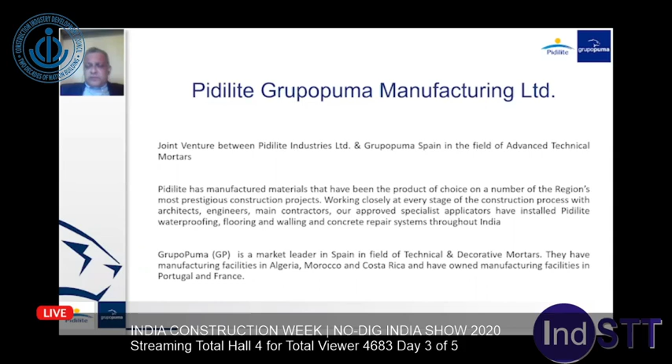Talking about our partners, Grupo Puma Spain, they are a market leader in Spain in the field of technical mortars, and they have very high-end expertise in restoration of old architectural monuments, with more than 20 manufacturing facilities in Spain. They have a presence in many European countries, manufacturing facilities in Algeria, Morocco, Costa Rica, Portugal, and France. They are also trying to make headway and are reasonably successful in the Middle East, Latin America, and South Africa.

The agenda - I am going to be talking a bit about energy consumption patterns in India, energy efficiency initiatives, ECBC 2017 guidelines, and Pidilite solutions for ECBC compliance for both roof and walls. The main agenda for today is a detailed presentation on EIFS, which will be done by Pepe.

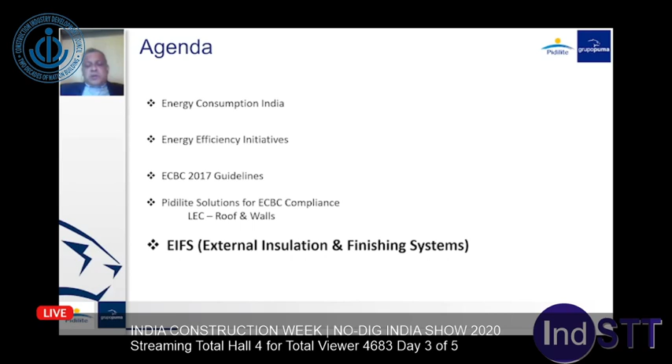Energy consumption in India - present energy consumption in India is 12 gigawatt hour per annum, expected to rise to 13.5 gigawatt hour by 2030, which is roughly about 12% more. Almost 65% of the energy generated in India is by thermal power plants, with obviously high production cost and more environmental damage by CO2 emissions.

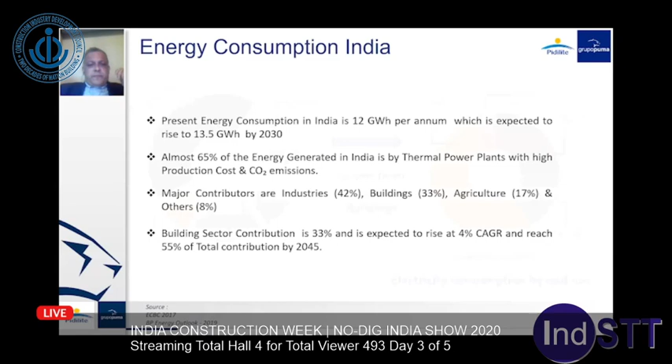Major contributors for energy consumption are industries at 42%, buildings 33%, agriculture 17%, and others 8%. The building sector's contribution is 33% of the total and is expected to rise at 4% CAGR and reach 55% of total contribution by 2045.

In the commercial building segment, the largest consumption is in the area of HVAC, which is 55%, lighting which is 25%, internal load 15%, and others 5%.

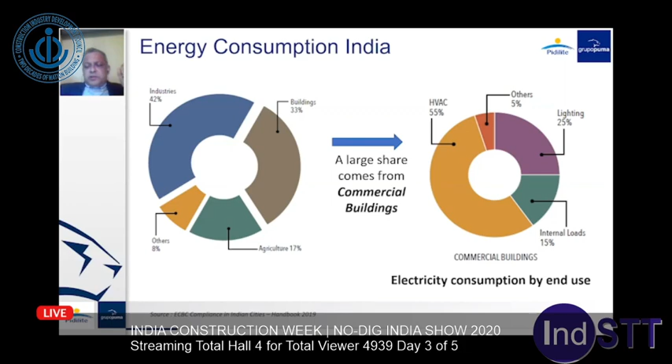Energy efficiency initiatives taken by government and private sector - as all of us know, the present government is especially focused on energy savings and on environment, and has made pronouncements and commitments nationally as well as internationally, taking leadership positions for CO2 emission reductions internationally. India has committed to reduce the emission intensity of the economy by 33% by 2030 from 2005 levels.

There are multiple initiatives, but what we are just going to briefly talk about is ECBC. For energy use optimization, the Energy Conservation Building Code (ECBC) was framed in 2007 and revised in 2017 by the Bureau of Energy Efficiency, making it more stringent, with more focus on infrastructure for implementation of ECBC guidelines, and certain standards and processes for monitoring progress and implementation of the code. Hypothetically, if ECBC had been implemented in 2007, savings would have been 4.3 billion electricity units and a 30 million metric ton reduction in CO2 emissions.

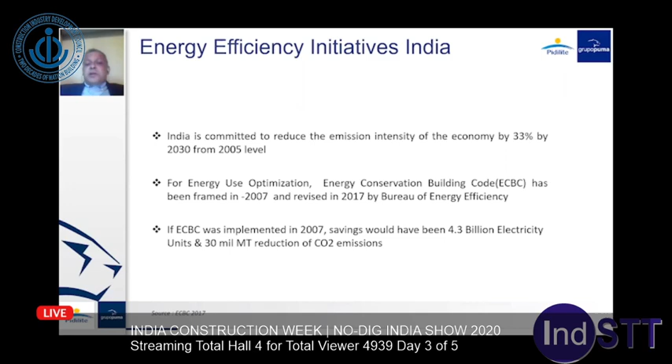ECBC 2017's primary objective is to provide minimum requirements for the energy efficient design and construction of buildings. The scope covers both commercial and residential buildings.

Right now, it has been made mandatory for commercial buildings with a connected load of 100 kilowatts or greater, or a contract demand of 120 kVA. For residential buildings, ECBC-R has been introduced but not made mandatory, though it is likely to become mandatory in the near future.

There are three levels of compliance: ECBC Basic, ECBC Plus, and Super ECBC. Basic level compliance is being made mandatory, and ECBC Basic should give an energy saving of 25% compared to a typical building. ECBC Plus should give 35% energy saving, and Super ECBC should give 50%.

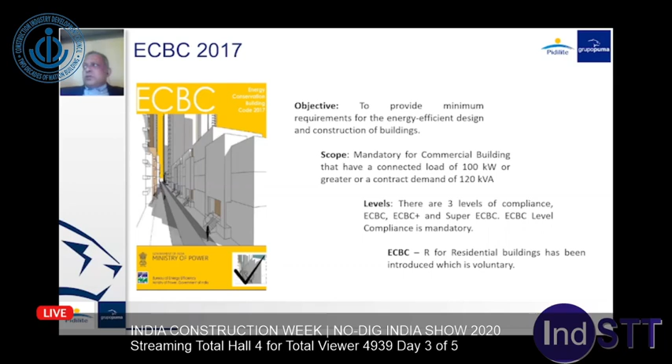Now, there are two methods of achieving ECBC compliance: the whole building performance method, and the prescriptive method.

In the whole building performance method, it has been left to the project owner to decide how to configure the project and its various elements to achieve basic compliance mandated by ECBC, guaranteeing a minimum energy saving of 25% over a typical building, which has to be attested by energy simulation software approved by BEE. So here the prerogative lies with the project owner to do what he finds more convenient and feasible.

Whereas in the prescriptive method, there already exist standards and specifications for various elements of the building, which a project owner has to meet to comply with ECBC basic standards.

For example, for the building envelope, for the roof as well as the terrace, there are certain U-values defined which a project owner has to meet to take ECBC compliance.

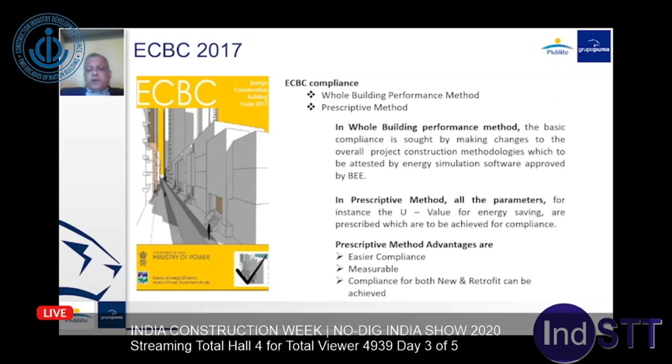Especially, this is a very good way to achieve compliance in case of retrofit buildings, where the project owner doesn't actually have to make any changes to the structure of the building. They can just apply it on the facade and roof and achieve basic compliance.

There are basically five climatic zones: composite, hot and dry, warm and humid, temperate, and cold, with different types of buildings already prescribed. I believe Karnataka is the only state where all five climatic zones can be found.

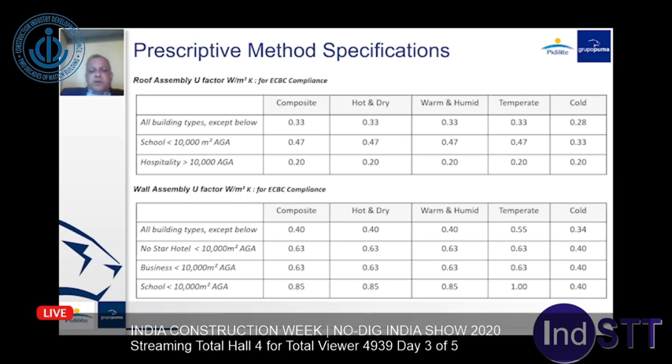Now, Pidilite offers solutions both for wall and roof for meeting ECBC compliance. For the roof, we have low energy consumption systems which we offer, including both the product as well as the execution.

The project owner has the scope to take different types of material at different U-values, different thicknesses, and different waterproofing guarantees. We are probably the only company offering a 25-year waterproofing guarantee, and it is possible to achieve much lower U-values compared to the prescribed U-values for roofs by going for Pidilite LEC systems.

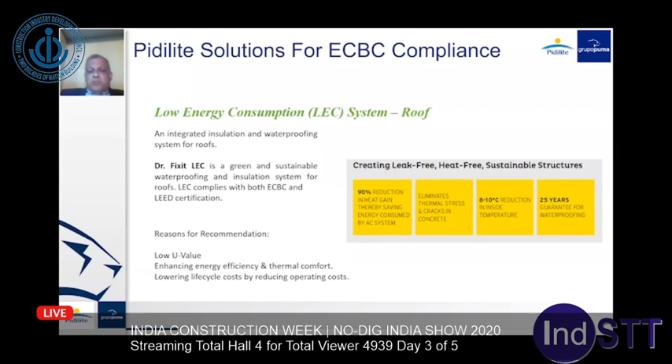As for walls, we offer EIFS in collaboration with our joint venture partners, Grupo Puma Spain, who have extensive experience in product development and execution, with projects lasting more than 20 years, and multiple facade options with beautiful architectural finishes. So we will be offering EIFS for wall insulation.

And to talk about EIFS in detail, I invite my co-presenter and partner Pepe. Once again, thank you for giving us this opportunity. Pepe, please take over. Thank you.

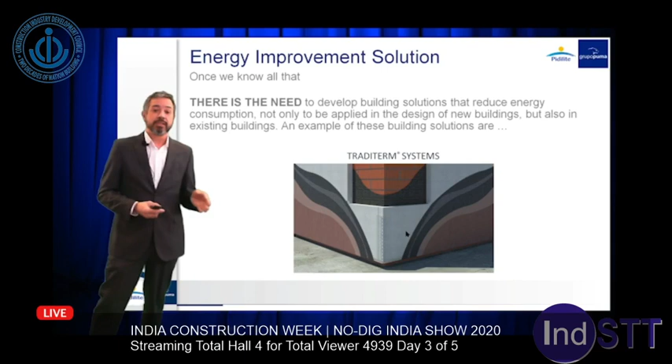Thank you, Prasad. As we have seen all this information, we decided to develop a new thermal isolation system. We are going to see why we decided to make an EIFS, and what are the main advantages of EIFS systems.

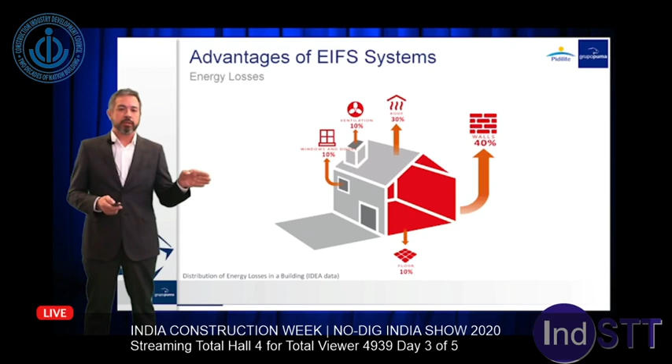First of all, the main studies on energy saving of buildings say that most energy losses in buildings come across the walls of the building. 40% of energy losses go through the walls. That's why we decided to develop a thermal isolation system for walls.

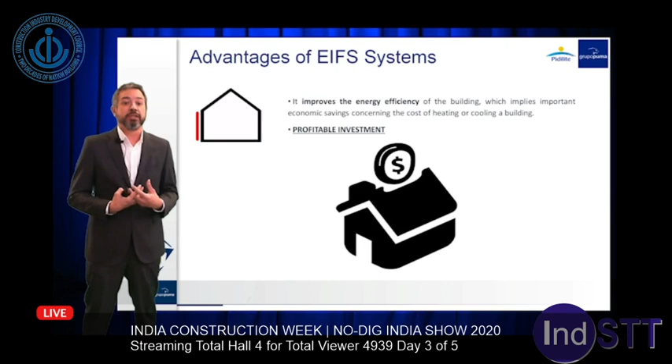This kind of system will not be an expense, but a profitable investment. In a short term of time, we will recover the amount spent on installation of the system through the savings in heating and refrigeration energy thanks to the installation of the isolation system.

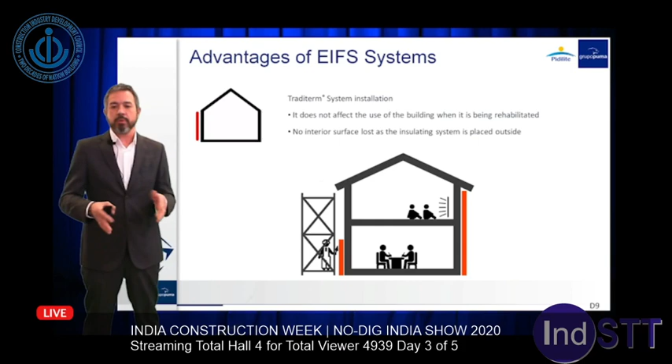As a system installed outside the building, it has several advantages in renovation of existing buildings, because the installation of the system doesn't affect the habitability of the building. So the normal use of the building can continue while we are installing the isolation system. And in addition, we are not losing any space inside the building.

As this system works as an envelope of the building, we are not only getting thermal isolation of the building, but also we are protecting all the structure and materials of the building, because we are protecting it from weather agents - the wind, the rain, the change of temperature. All this doesn't arrive to the components of the building, so we are making the life of the building longer.

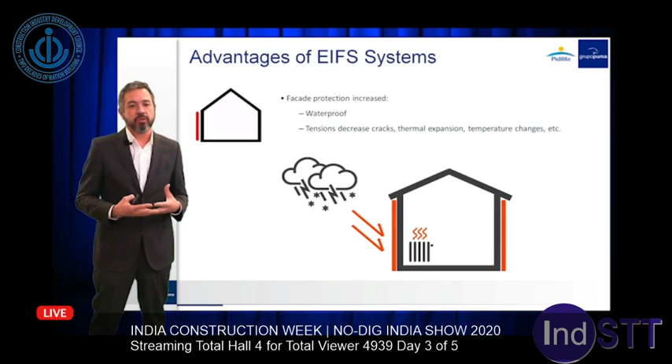All the components of the system, and the system itself, are waterproofing and are also permeable to water vapor, so they breathe the building.

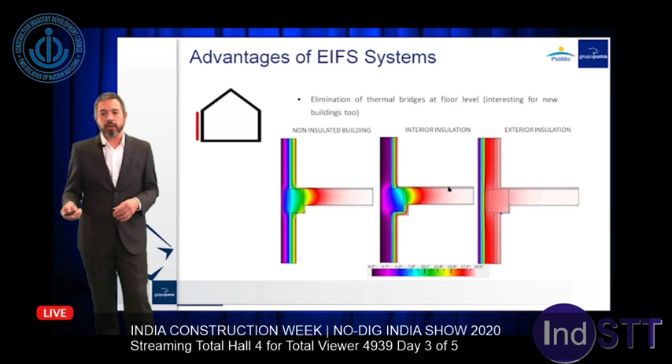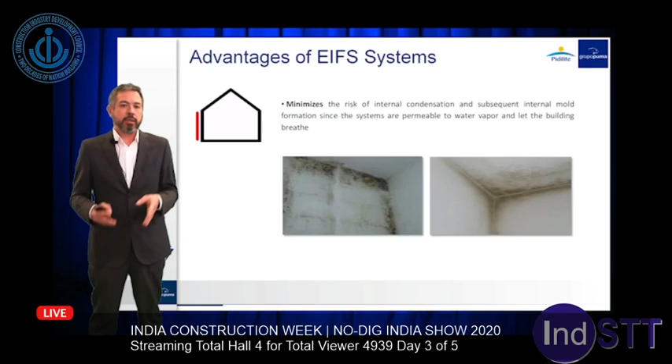As there is an external isolation, we eliminate all the thermal bridges we have in non-isolated and even in buildings isolated inside, because we have these thermal bridges in the slab of the building, and with our EIFS we don't have this kind of problem. So we avoid these problems of molds inside the building because of the thermal bridges and the difference of temperature between inside and outside of the building.

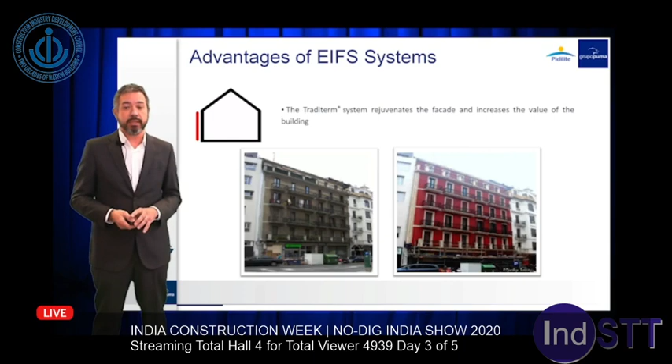And as it's an outside installation system installed in the facade of the building, we are not only getting this thermal isolation, but also we are renewing aesthetically the facade of the building. So we are improving the value of the building.

So we have decided to do this EIFS system. We are going to see now the main characteristics and components of this Traditerm EIFS system.

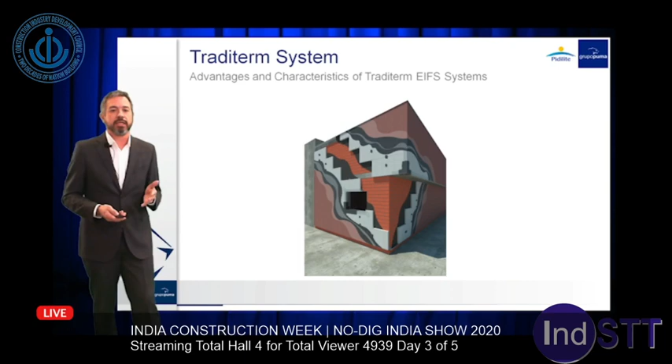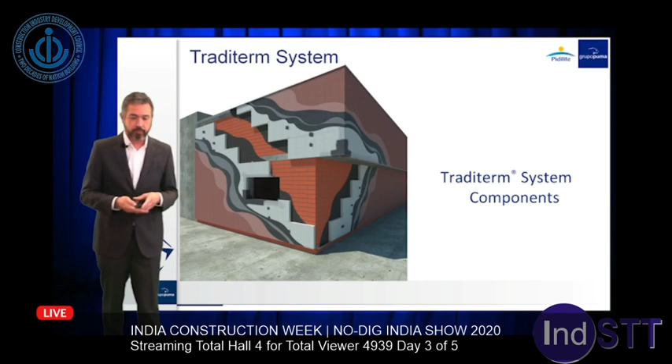As a system, we are offering all the components to the market. Pidilite Grupo Puma not only has the mortar and the finish or the panels, but all the necessary complements for the installation of the system. The installation is very simple.

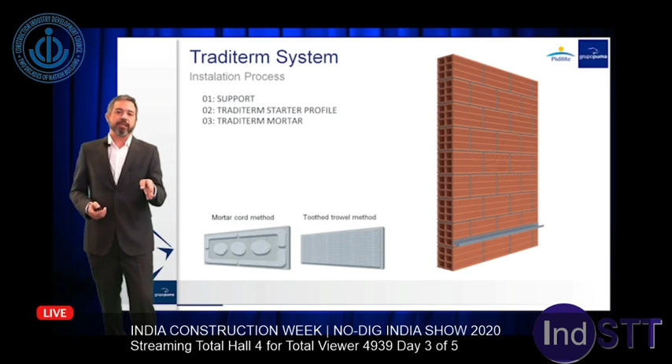We place, first of all, the starter profile, fixing it directly to the wall. We will place the first line of panels over this profile, which marks the starting line of the system. We will fix the panels to the wall by using the special mortar, fixing all the panels to the wall. After that, we will improve this fixing of the panels by installing the Traditerm anchors.

We will make a panel sanding to uniformize, to homogenize the absorption of the panels, to improve the adherence of the coat of mortar we are going to apply now. And we will cover all the anchors with mortar.

And after that, we only have to apply the coat of Traditerm mortar. This is a more or less 5 millimeters coat with a reinforcement mesh inside the coat of mortar, that will give us all the mechanical resistance we need in the system.

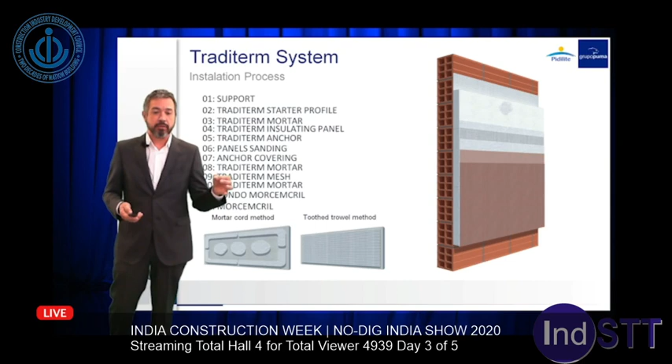And we will finish with Morcemcril Fondo primer and Morcemcril acrylic mortar, which gives us the aesthetical finish in addition to waterproofing and protection of the facade. This is a 5 millimeters mortar, which gives us an aesthetic finish with a wide range of colors.

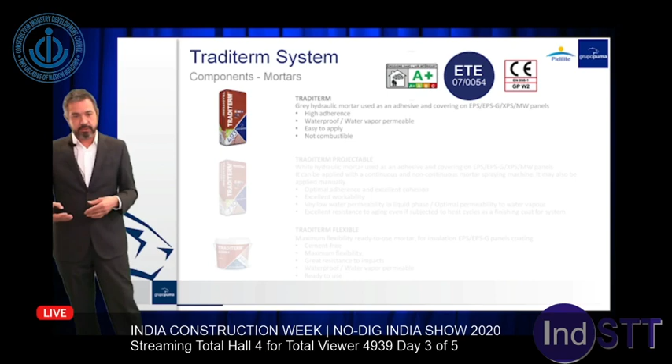So the first component, the main component, is the mortar. We have 3 kinds of mortar. First mortar is Traditerm standard, the most commonly used mortar, and we use this mortar for fixing the panels to the wall and to cover these panels with a render of 5 millimeters more or less. This mortar is a waterproofing mortar, is a breathable mortar, permeable to water vapor, so it lets the building breathe, and is specially formulated to fix this kind of isolation panels.

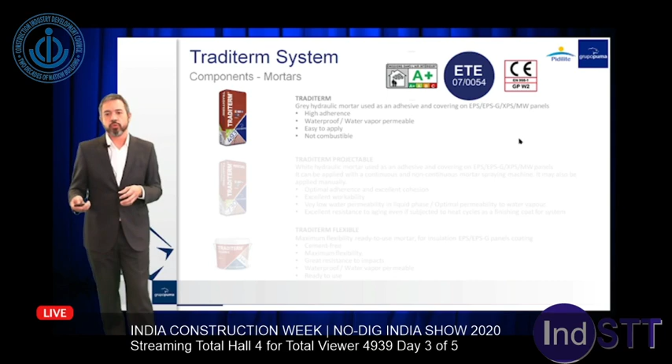So adherence is very, very good. All the components of the system follow the European standards, so we check all the quality controls in order to follow these standards.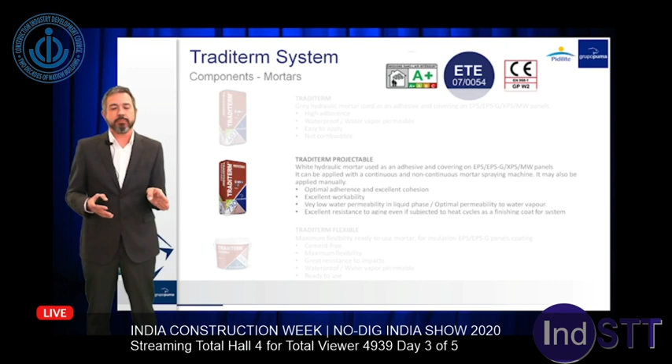The second one is Traditerm projectable. It has the same characteristics of Traditerm standard, but in addition, we can make the application of this mortar by using a projection machine. So we make a faster application, reducing the time of application of the system. For big buildings, this is a good option if we have the machine.

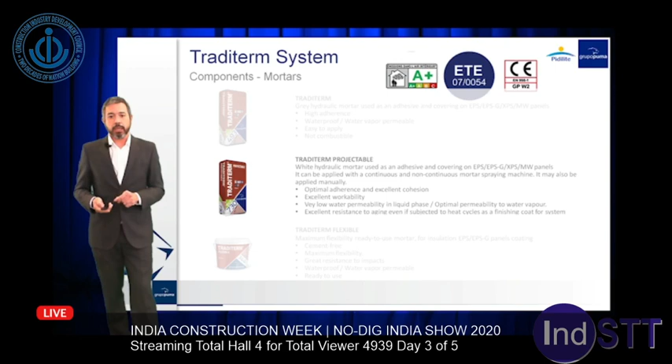And the third one is Traditerm flexible. This is a flexible version of our mortar. It's a cement-free mortar.

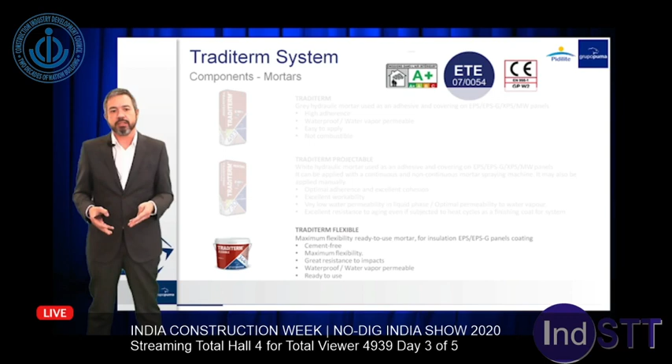It's ready to use, and we recommend this mortar mainly for the flexible version of the Traditerm system, which we'll see later. The second component is the isolation panel.

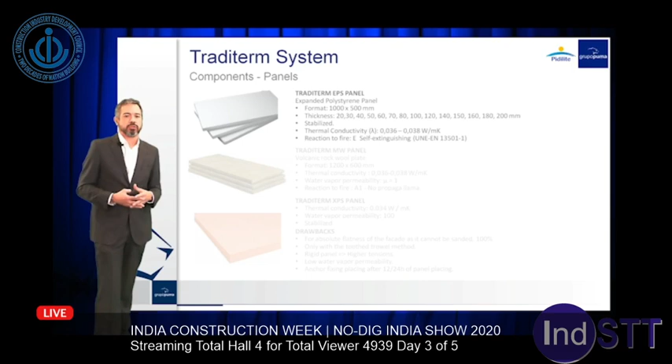That gives us the thermal isolation of the system. We have 3 different isolation panels. The first and most commonly used is the EPS panel, a high density EPS panel. We have it in different thicknesses depending on the level of isolation we are looking for. It's a good solution for thermal isolation because the thermal conductivity of this material is between 0.036 and 0.038, which brings us a very good level of thermal isolation.

The second one is the mineral wool panel. Thermal properties of this panel are very similar to EPS panels, but in addition, this panel has properties of resistance to fire. So it's commonly used in projects where we need this special protection because the size of the building or its use requires improved fire protection.

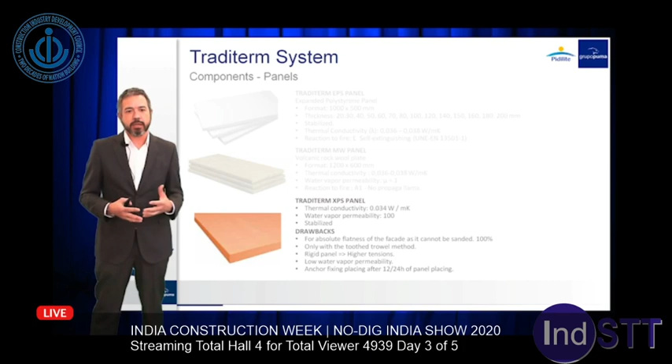And the third one is the XPS panel. This kind of panel has some advantages compared with the others because mechanical resistance is a little bit bigger, since it's a more rigid panel, and the isolation level is a little bit higher than EPS or mineral wool panels. Not so much, but a little bit more.

But on the other hand, since these are very rigid panels, we cannot use them if the leveling of the substrate is not perfect. If we don't have a 100% leveled substrate wall, we cannot use this kind of panel because we can have tensions which develop cracking and problems in the future. The installation of these panels can only be made using the notched trowel system, not the point/dab system, because we need a perfect wall and a continuous layer of adhesive.

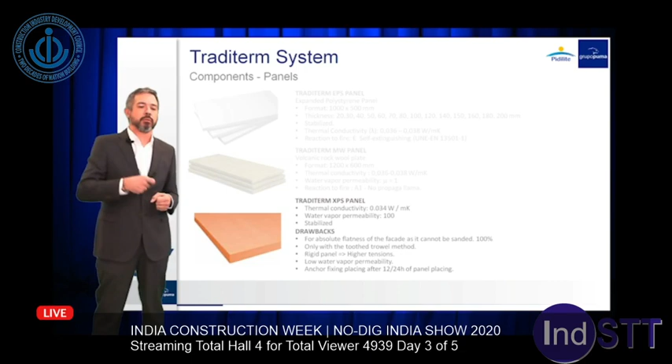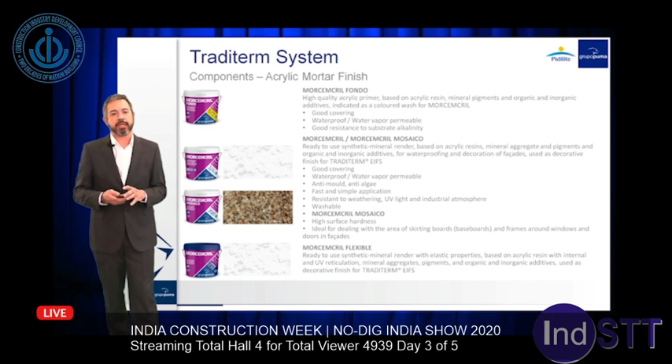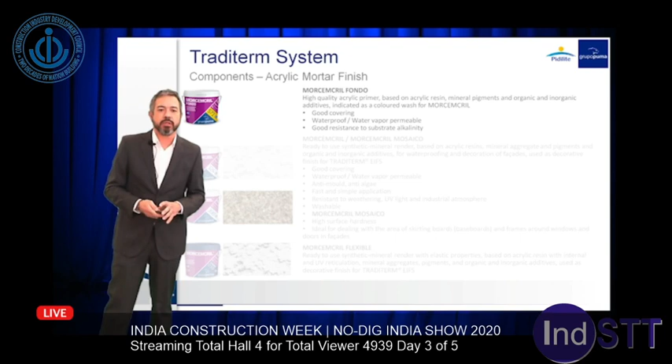And the third component of the system is the finishing. We recommend this acrylic mortar as the finish. We have different versions of acrylic mortar too. First of all is the primer. We use this primer, Morcemcril Fondo, to homogenize the absorption of the substrate and of the mortar we have applied before. As this is a colored primer with the same range of colors as the acrylic mortar, we reduce the amount of acrylic mortar needed to cover the surface afterwards.

After the primer, we can use different kinds of acrylic mortar for finish. We have the standard Morcemcril, the most commonly used one. It's an acrylic mortar, cement-free, waterproofing and breathable like the other components of the system. We apply it in 5 millimeters, and with this layer we have the necessary waterproofing against rain. There is a wide range of colors, which we'll see, and it's easy to apply.

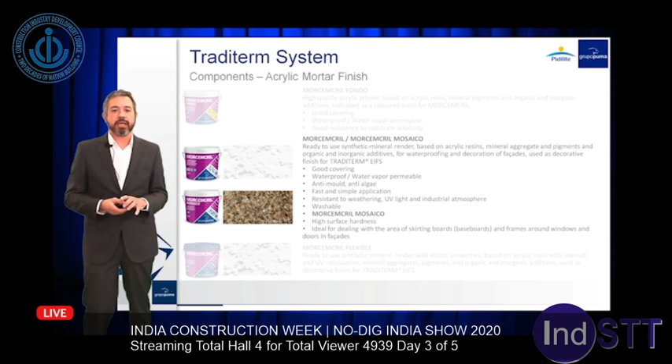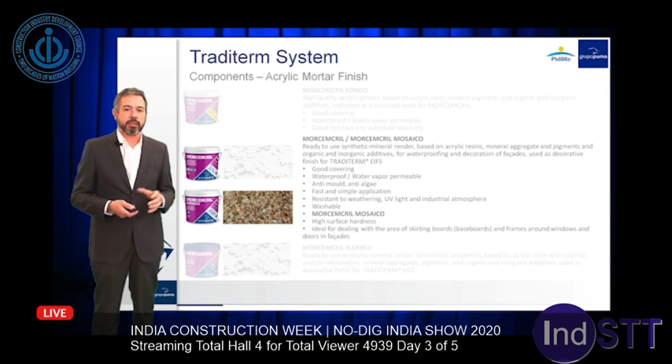It's 100% compatible with the Traditerm mortar. In the lower part of the building, where it's more attacked by people, traffic and so on, we can apply this second kind of mortar: Morcemcril Mosaico, with the same characteristics of waterproofing and breathability as Morcemcril, but with more mechanical strength than the normal Morcemcril.

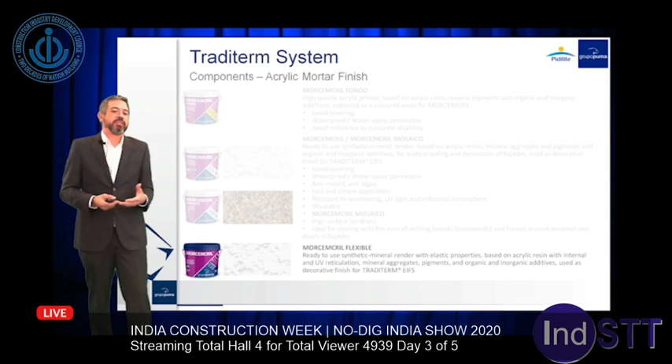And the third kind of acrylic mortar is Morcemcril Flexible. This is a special formulation, especially recommended for the flexible version of the Traditerm system. It has the same characteristics as Morcemcril or Morcemcril Mosaico in terms of waterproofing and water vapor transpiration, but it's also more flexible, so we use it in situations where this flexibility is necessary.

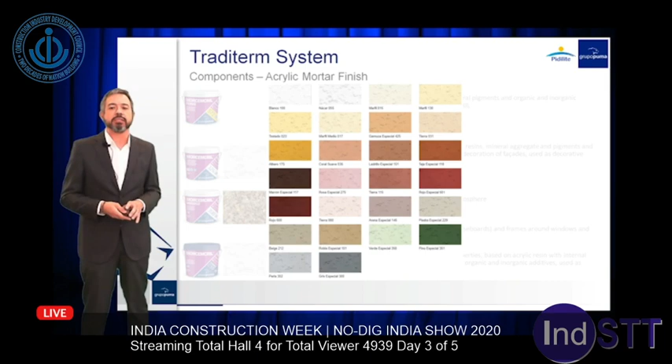In addition to all these main components of the system, we have all the complements necessary for its installation. We have this Traditerm mesh, which we've talked about. It's the mesh we place inside the layer of mortar to improve the mechanical resistance.

The aluminum starter profile is used to start the system, placing the first line of panels. Traditerm anchors improve the fixing of the panels to the wall.

The Traditerm guttering profile with mesh, and the Traditerm PVC corner reinforcements with mesh. This kind of profile protects all the corners of the building and avoids several aesthetic problems of damage to the wall.

Traditerm window finishing profile is used in the joints between the wall and the windows, to make this kind of joint.

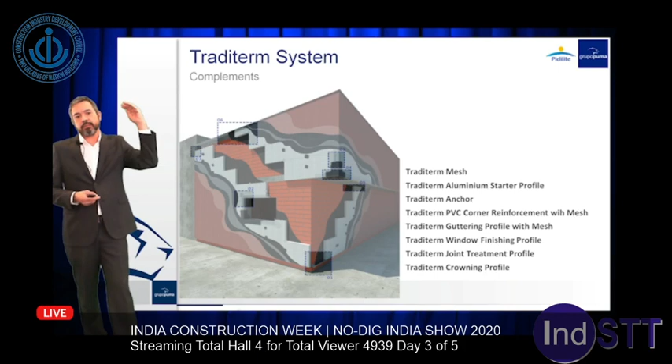Traditerm joint treatment profile covers the structural joints of the building. Traditerm crowning profile is placed at the top part of the system to protect from rainwater. Combining all these components and complements, we find different versions of the Traditerm system.

The first one is Traditerm EPS XPS. It's the basic one, the most commonly used. Here we use Traditerm or Traditerm Projectable as a mortar for fixing and covering the panels. We use EPS or XPS panels for the thermal isolation, and we finish the system with our Morcemcril Fondo and Morcemcril or Morcemcril Mosaico.

The second one is Traditerm Mineral. It's the same as Traditerm EPS XPS, but we use mineral wool panels instead of EPS or XPS panels. Here we obtain the fire resistance we may need in several projects.

The third one is Traditerm Flexible. We use this version when we expect the building to suffer high attacks from weather, big changes of temperature, or when the structure may have little movements. We use this flexible version to absorb and avoid cracking from these movements. In this system, we use Traditerm as adhesive to fix the panels, only EPS panels, and we render them with Traditerm Flexible. The finish is done with Fondo Morcemcril and Morcemcril Flexible.

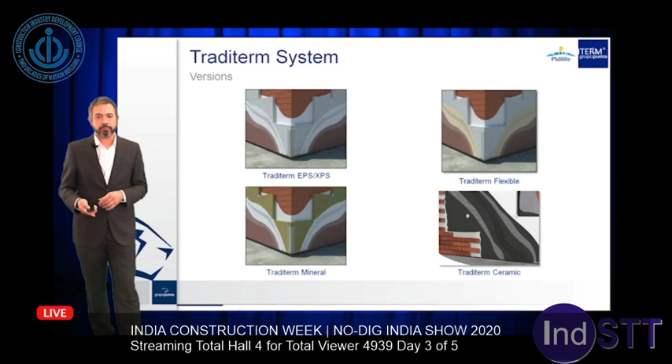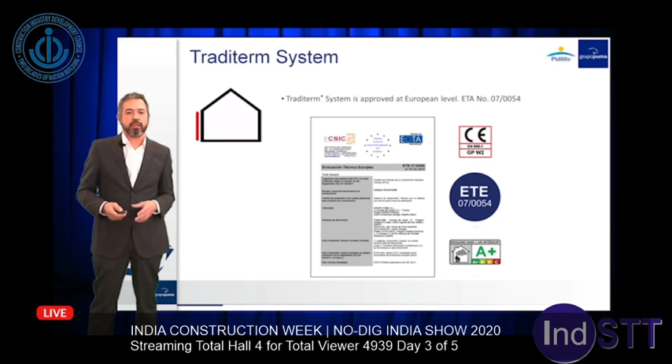All these systems, versions, and components follow European standards. The EOTA is the organism which controls the quality of these kinds of systems in Europe, and the ETA is the document which certifies all the properties of the system for thermal isolation, waterproofing, breathability, and other characteristics. All components also follow European standards for the different kinds of mortar or material we use.

In addition to these product and system characteristics, Pidilite Grupo Puma offers several services to the Indian market to complement the system itself. We have a very trained technical team which works in our R&D department, developing new finishes of the system and always looking for how to improve the characteristics of our thermal isolation systems.

We also have a specialist application team who give professionals involved with installation of these systems the assistance they need, explaining which version of the system is most adequate for the project they are developing, or any assistance needed in the design of the system. We also have applicators who can help and assist the people installing the system in the building, showing how to do it in the best way to avoid problems.

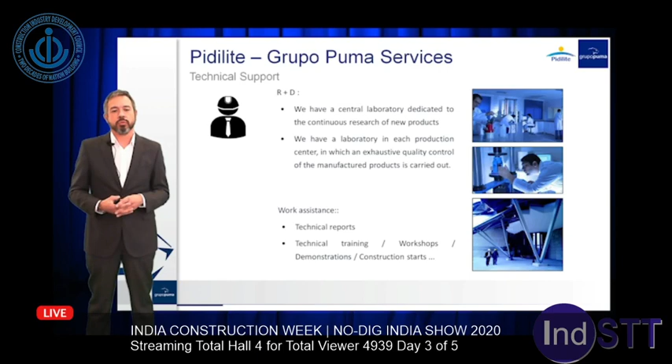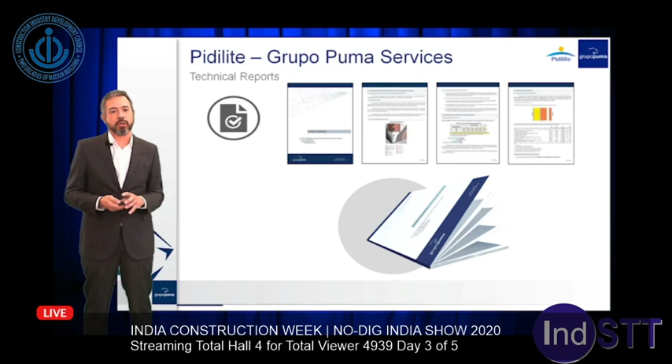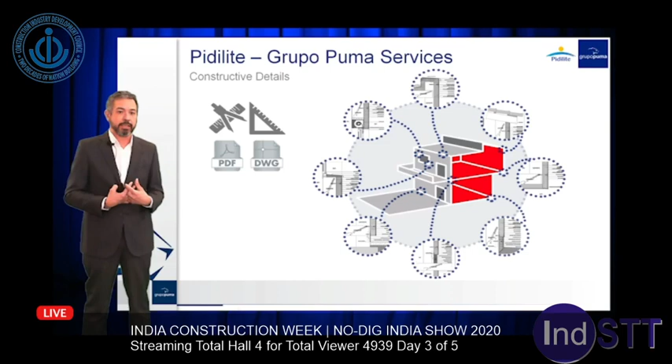As this kind of system has been applied in Europe for many years, we have a lot of projects done with our Traditerm system, and we have documentation about all these projects. We have technical reports with technical information on different projects made with our system, which can be used by technicians who want to include our system in their projects. We also have constructive details, BOQs, and a lot of documentation to make technicians' work easier when deciding to install this kind of system.

I wanted to show you some examples of buildings where this kind of system has been applied, so you can see different kinds of buildings, different finishes, and different materials of isolation panels used in these projects.